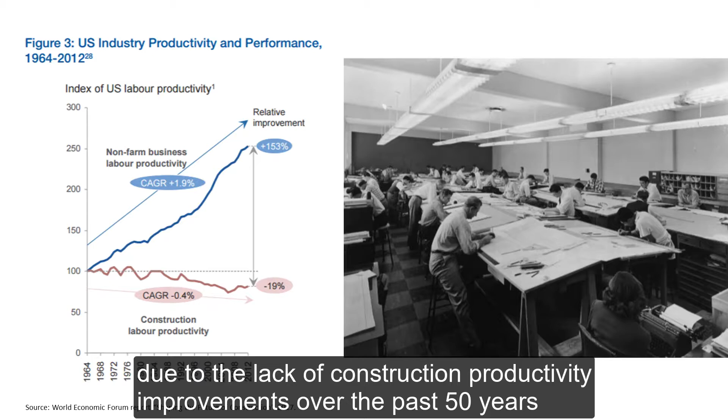There is a risk that the demand for new buildings and infrastructure will not be met due to the lack of construction productivity improvements over the past 50 years compared to other industries. A recent study from McKinsey that looked at industries' move to digitization showed manufacturing near the top at 3.3% investment, but the study put construction close to the bottom at 1.2% investment.

Based on Construction Intelligence Center data for civil infrastructure, total infrastructure spend will total over $10 trillion for the next 5 years. Of this, 50% will be in roads and highways and approximately 25% for each rail and other, such as airports, ports, dams and inland waterways.

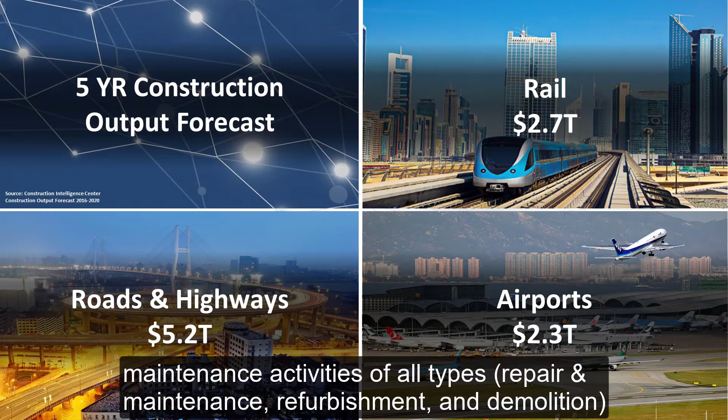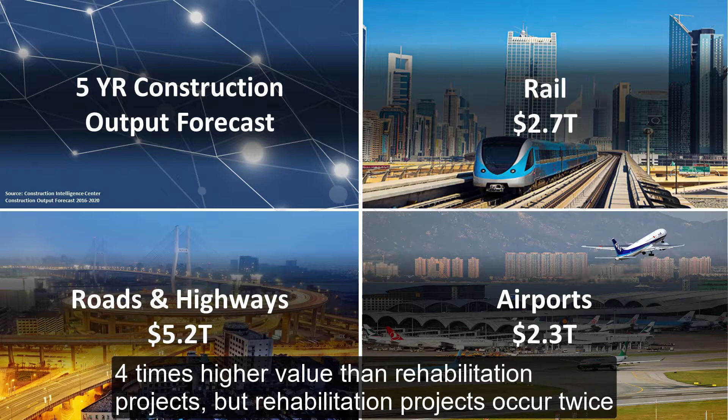Within these transportation projects, new construction continues to outspend maintenance activities of all types: repair and maintenance, refurbishment and demolition. Even though the majority of spend occurs on new construction, there is a much higher volume of rehabilitation type projects. In the US, for example, new construction projects have 4 times higher value than rehabilitation projects, but rehabilitation projects occur twice as much, and 80% of rehabilitation projects are carried out by local government.

Add to this the unrelenting demand of the construction industry as a cornerstone to the industry and overall economy, contributing about 6% of global GDP. That's $10 trillion in annual revenues.

When you look at a construction site though, it can look like chaos. Projects are complex, in congested areas, and close coordination is required in real time. The Boston Consulting Group recently estimated that within 10 years, full-scale implementation of digital infrastructure delivery across the asset lifecycle could lead to annual global cost savings of $0.7 trillion to $1.2 trillion in non-residential construction.

In the era of connection, the infrastructure design industry has a large opportunity to lead the transition to digitized processes, providing more value to their clients. The solution to the industry's challenges, as well as the business challenges of individual consultancy firms, is BIM.

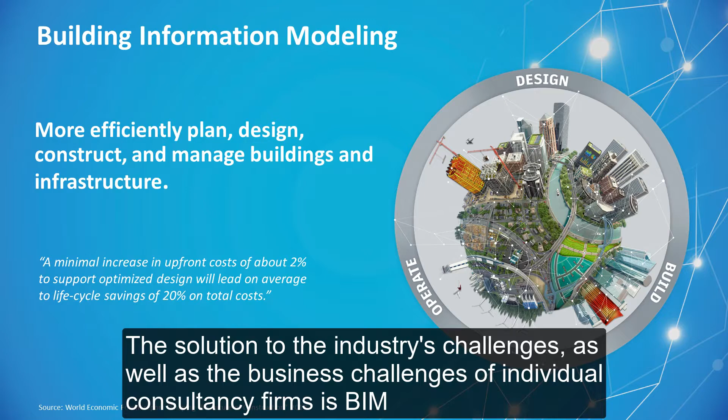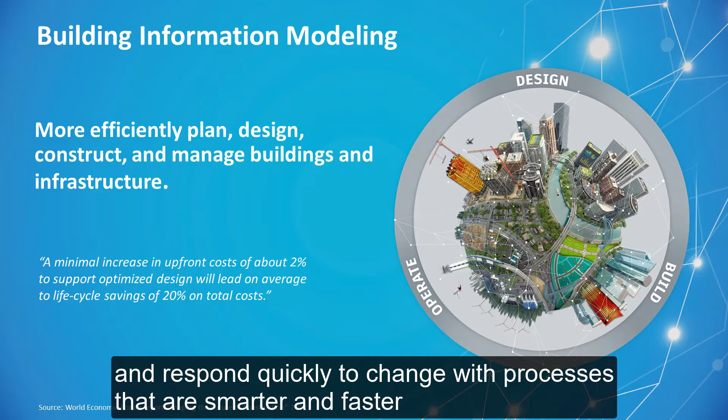Building Information Modeling, or BIM, is an intelligent 3D model-based process that equips architecture, engineering and construction professionals with the insight and tools to more efficiently plan, design, construct and manage building and infrastructure. With BIM, you can improve project understanding and decision making, share and use the same consistent data across the project lifecycle from your desk or in the field, and respond quickly to change with processes that are smarter and faster.

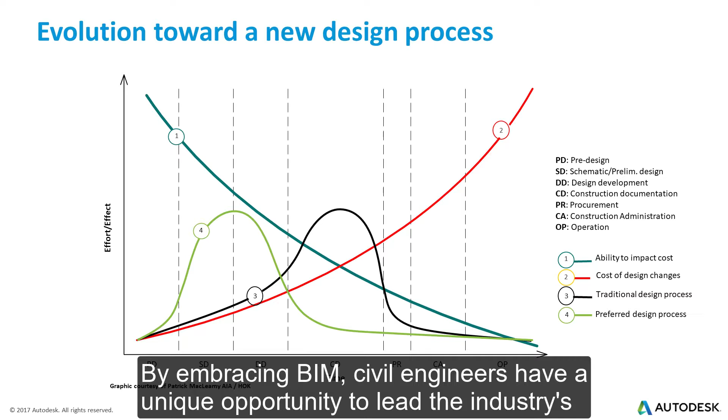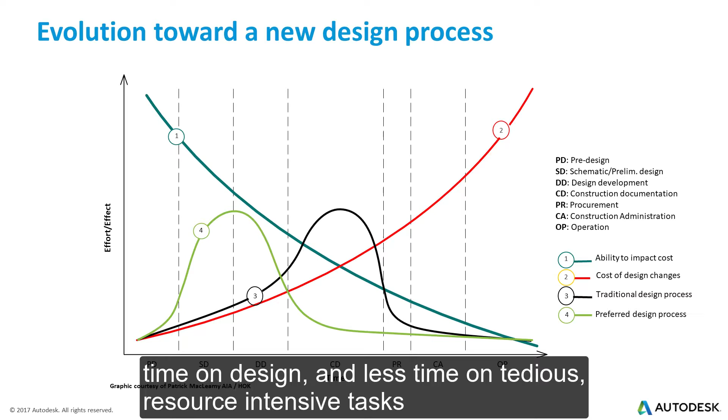BCG and McKinsey go further in defining what digitization means for the construction industry. It is enabled by fast acceleration of technology trends driven by cloud computing and mobile technology. By embracing BIM, civil engineers have a unique opportunity to lead the industry's transformation to a more efficient way of working. BIM allows for earlier design insight and decision making, allowing changes to be made when it's less costly. Because BIM automates the production and coordination of much of the construction documentation needed on a project, civil engineers and designers can spend more time on design and less time on tedious, resource-intensive tasks.

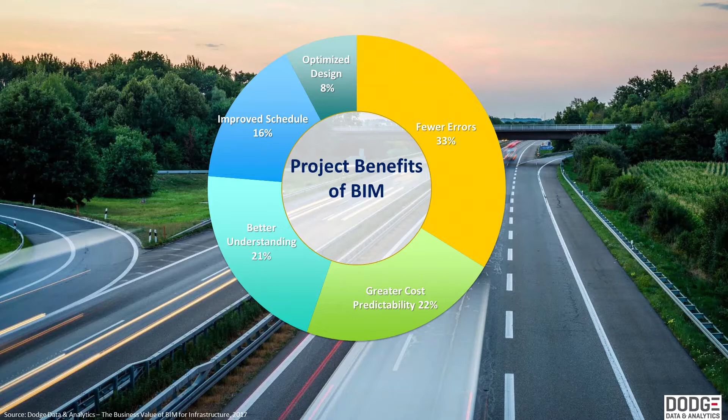Here's a stack ranking from the 2017 Dodge report depicting the benefits of BIM. As we can see, BIM resulted in 33% fewer errors, 22% greater cost predictability, 21% better understanding, 16% improved scheduling, and 8% optimized design. In addition, BIM can help civil engineers address business challenges you are facing today.

This includes winning new work, involving meeting client demands for BIM deliverables, participating in alternative project delivery models, and effectively communicating design intent to earn stakeholder buy-in.

Deliver higher quality designs. This means improved building performance via analysis tools and using visualizations of VR to experience your designs before they are built.

Work more efficiently. This includes reducing errors and change orders, improving collaboration with engineers and contractors, and staying on time and within budget. And finally, expanding billable services, including extending services beyond design and into building operations with model maintenance. Also, recast advisory relationships with clients to deliver long-term value to assets.

These industry trends create specific business challenges for civil engineering firms, including winning and retaining work, expanding billable services, increasing project complexity, meeting sustainable design standards, increasing demand for BIM, and hiring and retaining talent. Traditional 2D practices and siloed ways of working are no longer sufficient, and there is a growing recognition of the need for transforming how work gets done. Increasing BIM adoption by contractors, owners, and for infrastructure projects is evidence of this shift.

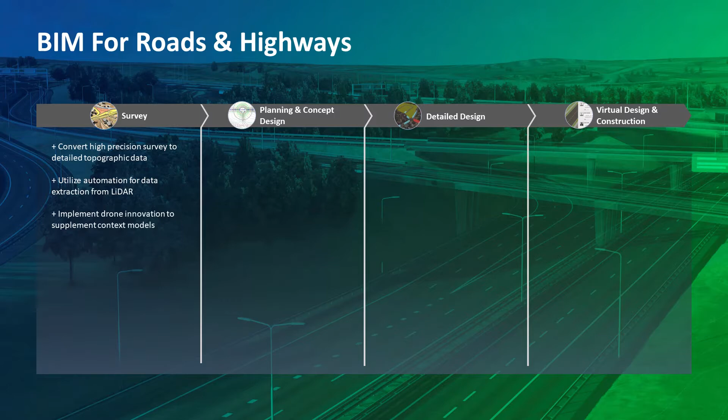By adopting BIM for surveys, engineers can convert high-precision surveys to detailed topographic data, utilize automation for data extraction from LiDAR, and implement drone innovation to supplement context models. Leveraging high-precision survey collection from GPS and total stations to build out existing conditions to begin the design process in Civil 3D. This is the first step to designing in context.

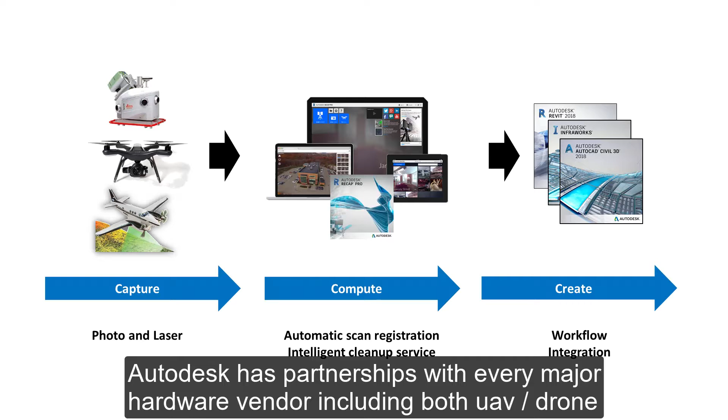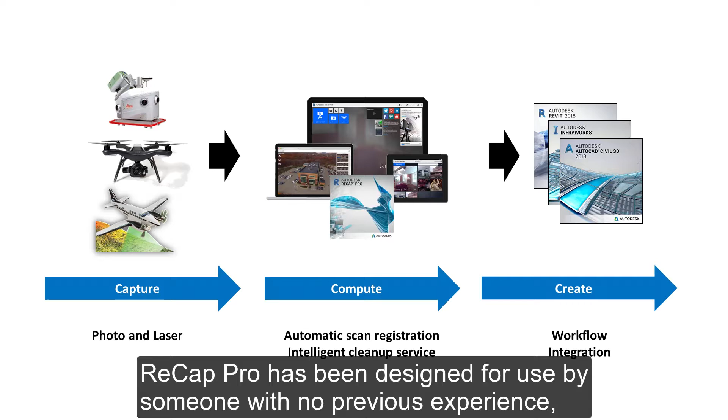Autodesk has created a powerful and easy-to-use workflow for reality capture in order to bring you a scan-to-BIM workflow. Autodesk has partnerships with every major hardware vendor, including both UAV drone manufacturers and laser scanner manufacturers. Recap Pro has been designed for use by someone with no previous experience, so it's very user-friendly.

One-click automated workflows do powerful tasks like scan registration, which stitches multiple scans together into one point cloud, and intelligent cleanup services, which automatically remove unwanted noise.

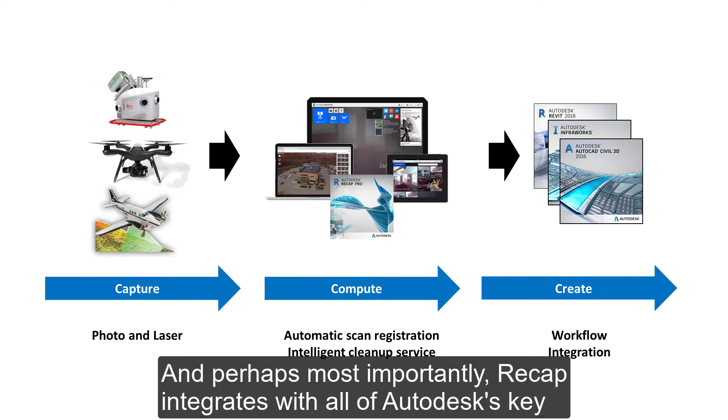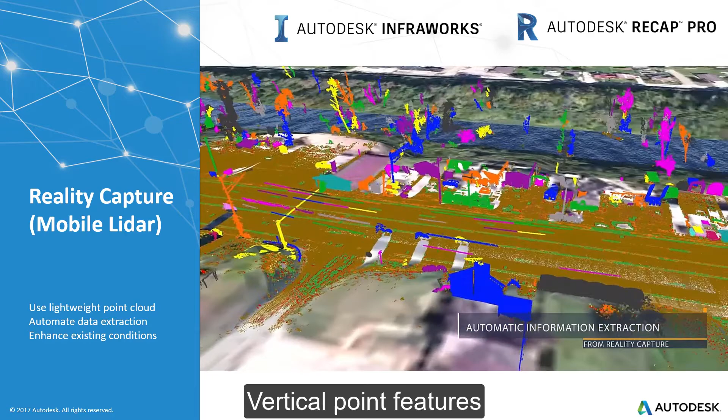Perhaps most importantly, Recap integrates with all of Autodesk's key AEC design creation tools, so you can bring that reality data into the design creation tool of your choice. This includes lightweight point cloud, reducing the original point cloud by 90%, automated data extraction, bare earth terrain, vertical point features and linear features, and enhanced existing conditions using linear features to existing surfaces.

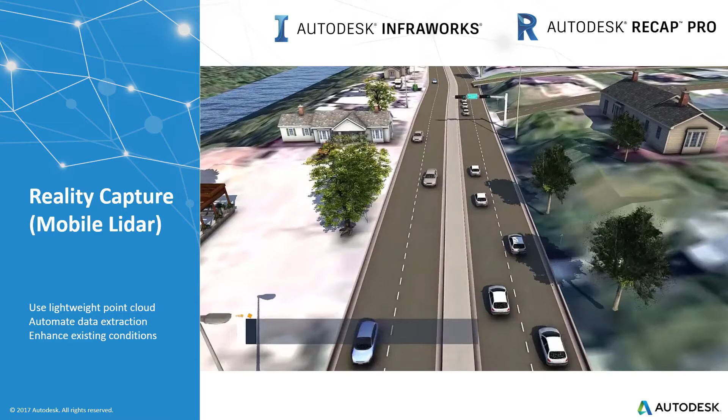Reduce survey effort. Reduce the time required to survey the site. Minimize the size of your survey crew. Improve safety with new methods of data collection. Limit crew activity on active construction sites.

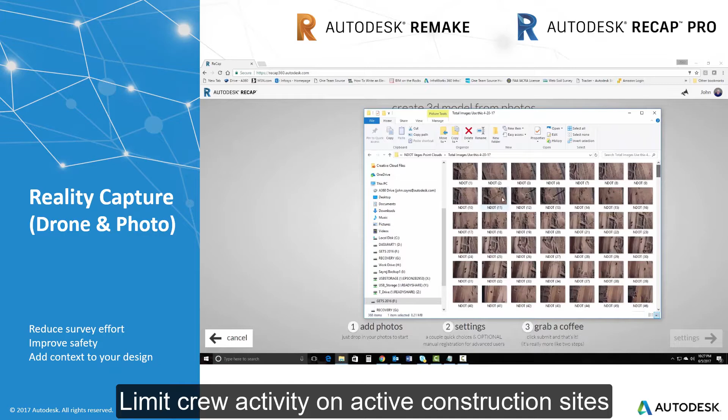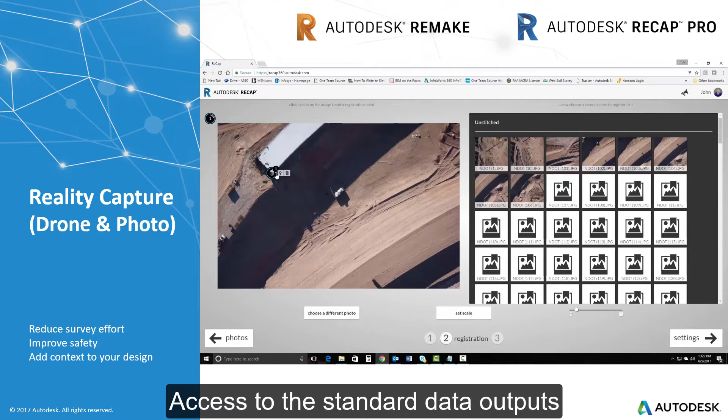Add context to your design. We're the one-stop shop to manage your data, quicker with cloud-based processing, with access to the standard data outputs, quality and format you need so you can begin your design.

Now let's take a look at how BIM and the AEC Collection can help you at conceptual planning.

Aggregate data to create project context. Develop parametric roadway, bridge and drainage designs. Evaluate design alternatives, perform analysis to optimize designs, and finally communicate your design with videos and renderings.

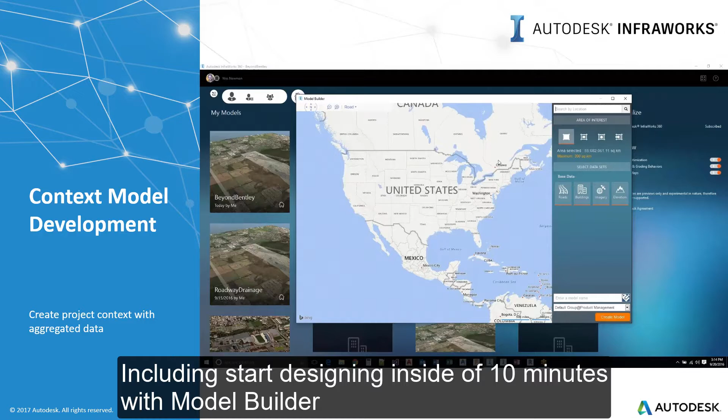Create project context with aggregated data, including starting designing inside of 10 minutes with Model Builder. Aggregate terrain, aerial photos, GIS, CAD and BIM. Get started quickly with the ability to add more detail as needed.

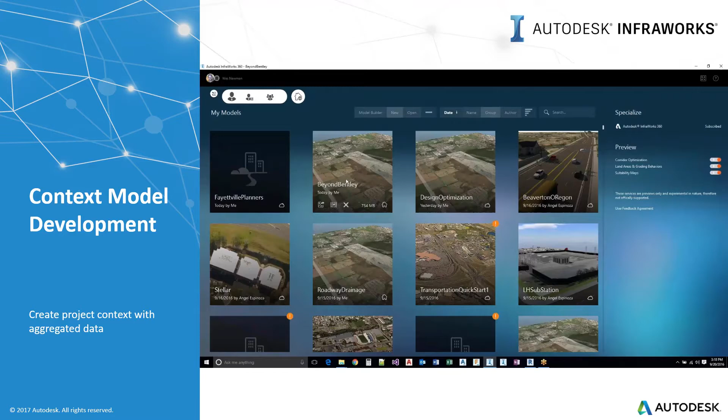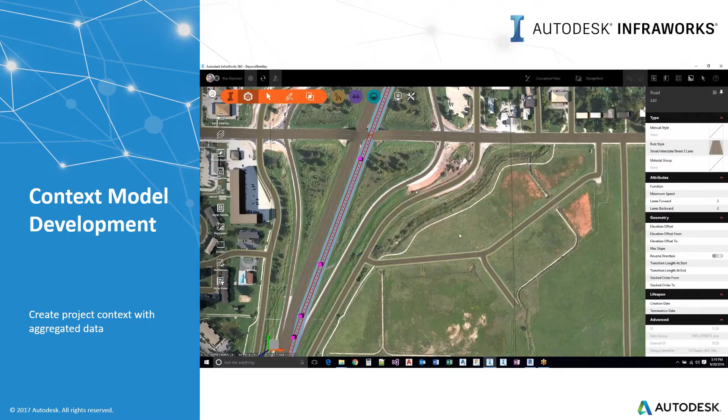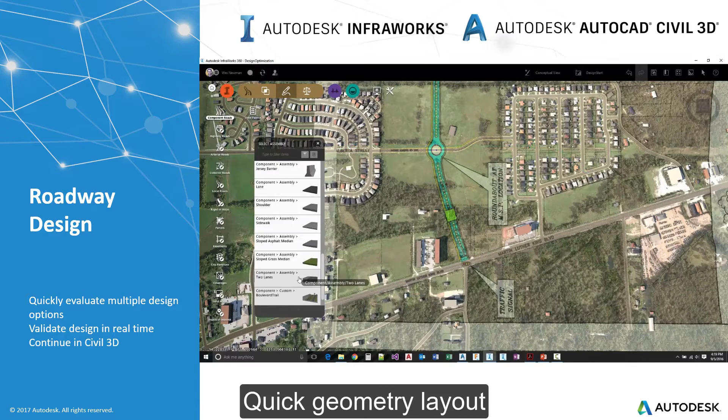Quickly create and examine multiple design options earlier in the process. Quick geometry layout, intuitive model-based design, turning lanes, intersections versus roundabouts.

Validate design in real time within context analysis. Dynamic quantities provided in real time. Profile optimization, intersection design, traffic simulation, and super elevation.

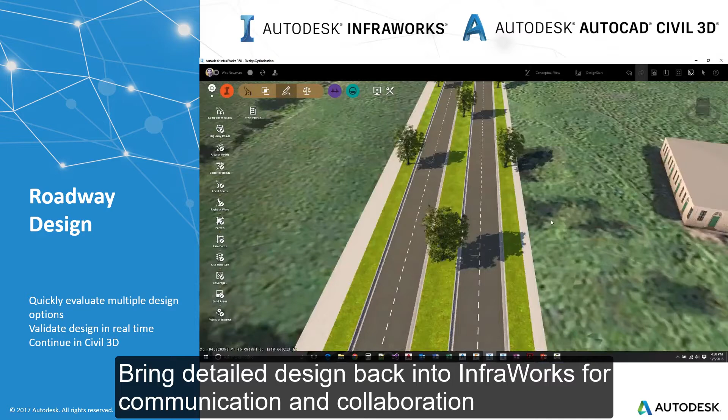Continue design in Civil 3D. Import InfraWorks model to Civil 3D. Continue detailed design and documentation. Bring detailed design back into InfraWorks for communication and collaboration.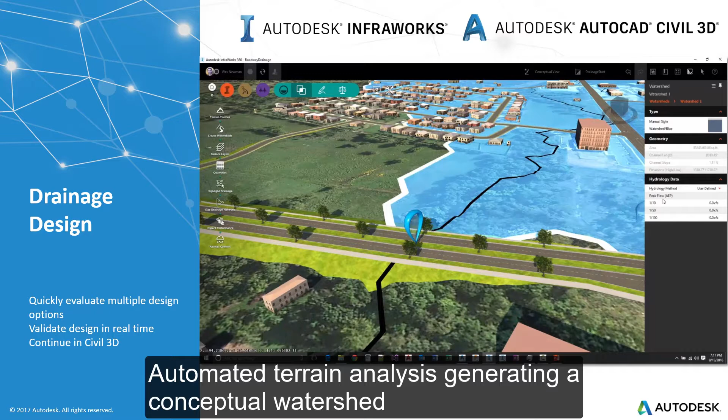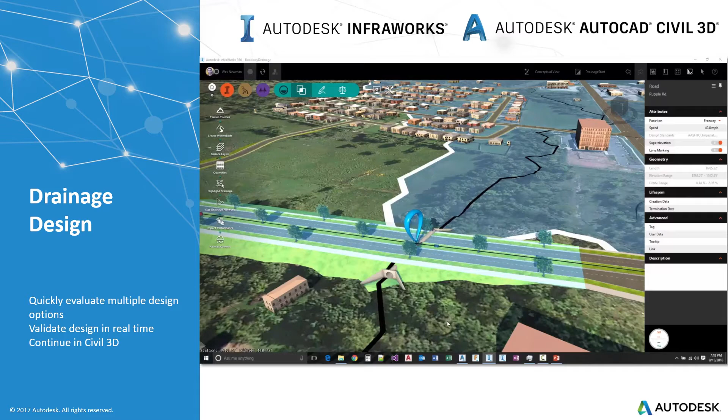Quickly evaluate multiple design options through simplified watershed analysis, automated terrain analysis generating a conceptual watershed, automated culvert location and sizing based on user-defined criteria, automated placement and sizing of inlets and pipes for closed drainage, dynamic quantities provided in real time.

Validate design in real time, integrated design and analytics process, real-time performance feedback of drainage systems like hydraulic grade line, energy grade line, invert elevations, surcharge, etc.

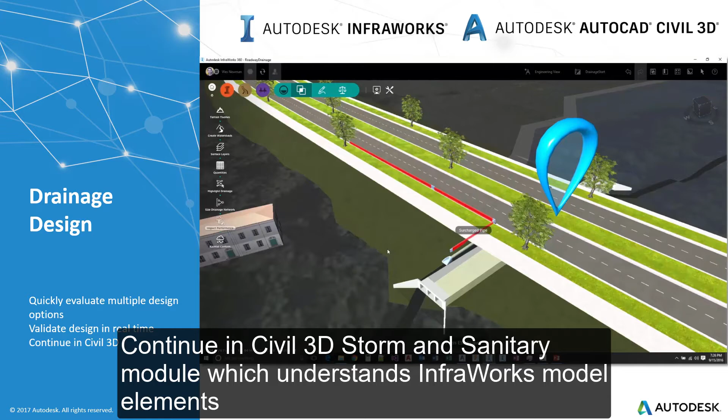Import InfraWorks model to Civil 3D. Continue in Civil 3D Storm and Sanitary module which understands InfraWorks model elements. Continue detailed design and documentation. Bring detailed design back into InfraWorks for communication and collaboration.

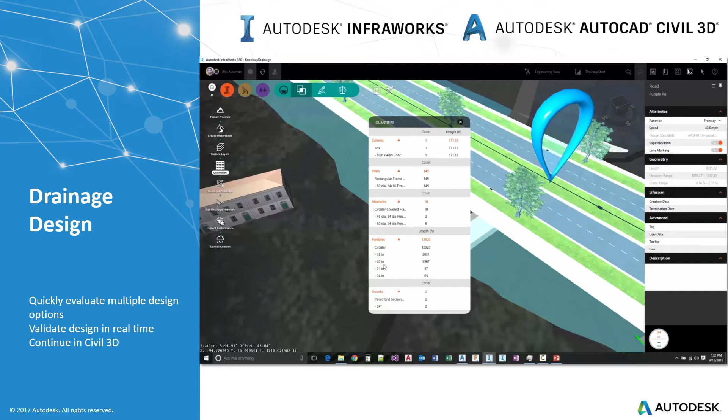Enhanced interoperability brings Revit and InfraWorks together to perform more efficient parametric bridge design. Quickly evaluate multiple design options.

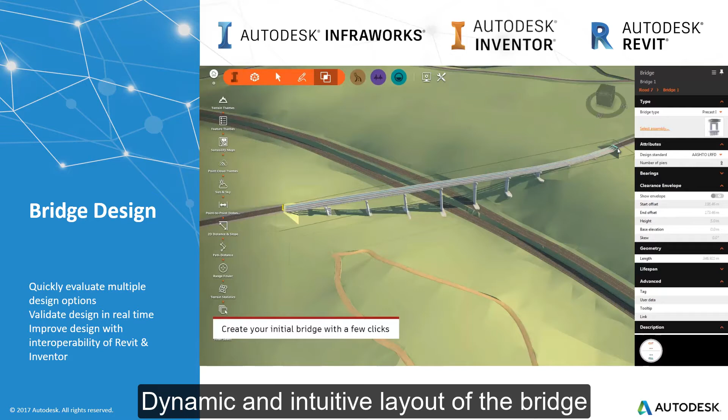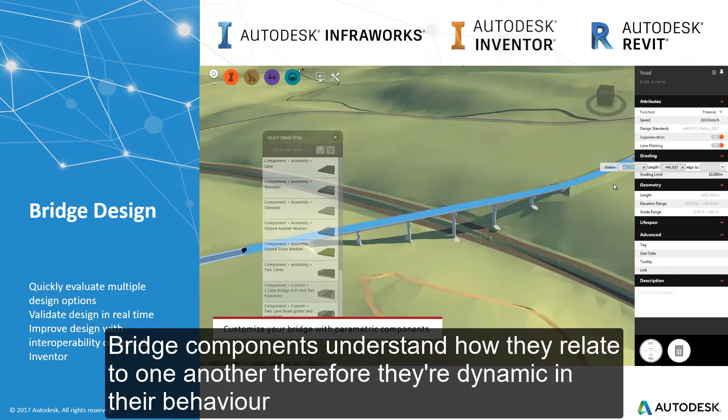Within InfraWorks, dynamic and intuitive layout of the bridge, automated design of components such as superstructure and substructure with parametric controls. Bridge components understand how they relate to one another, therefore they're dynamic in their behavior. Library of bridge components included with all the parametric controls required.

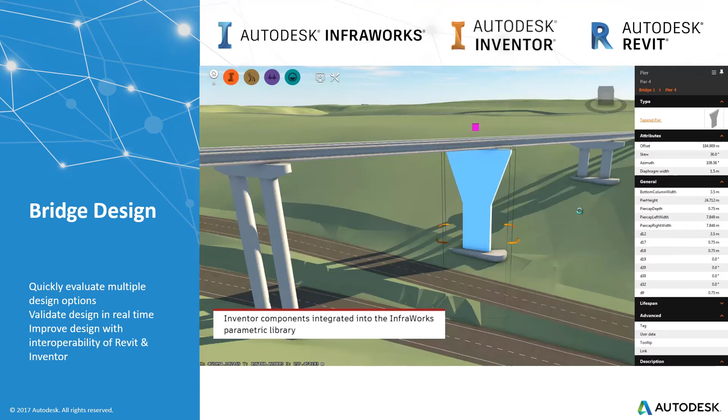Validate design in real time, dynamic quantities provided in real time, built-in line girder analysis.

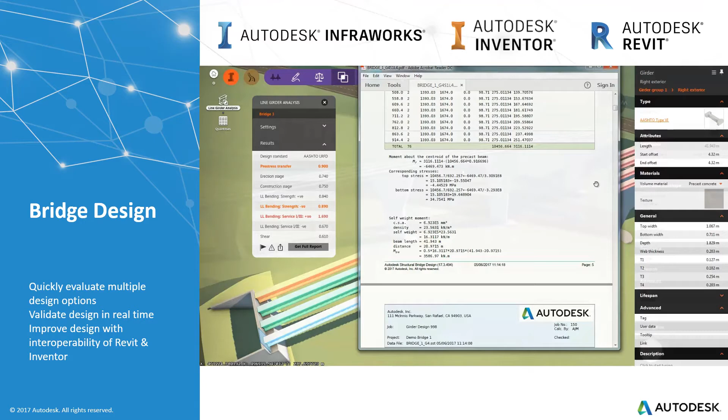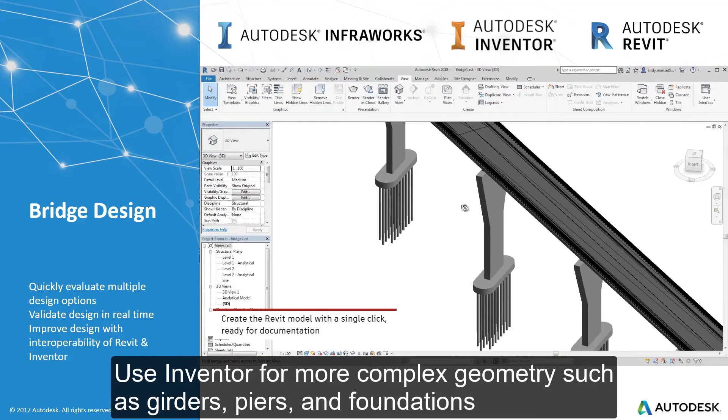Interoperable with Revit and Inventor. Use Inventor for more complex geometry such as girders, piers and foundations. One-click push to Revit. Family support enables Revit functionality.

Now let's have a look at how BIM and the AEC Collection can help you with your preliminary and detailed designs. Design in a dynamic 3D model-based environment.

Design with contextual rule-based standards. Produce plans that dynamically reflect changes. Collaborate across multidisciplinary design teams. And centralized access to project information.

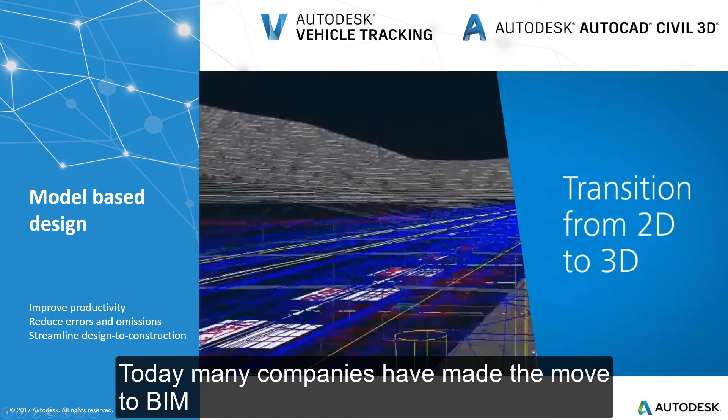Today, many companies have made the move to BIM. Civil 3D in the dynamic model provides an associative relationship between geometry, corridor model and plans, which enables productivity, reduced errors and omissions, and delivering accurate digital data to the field.

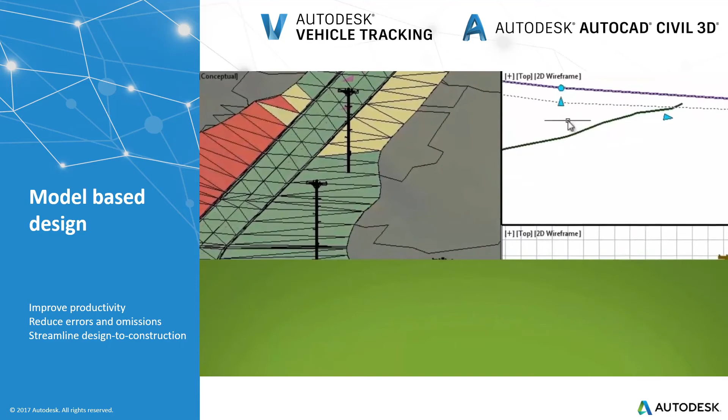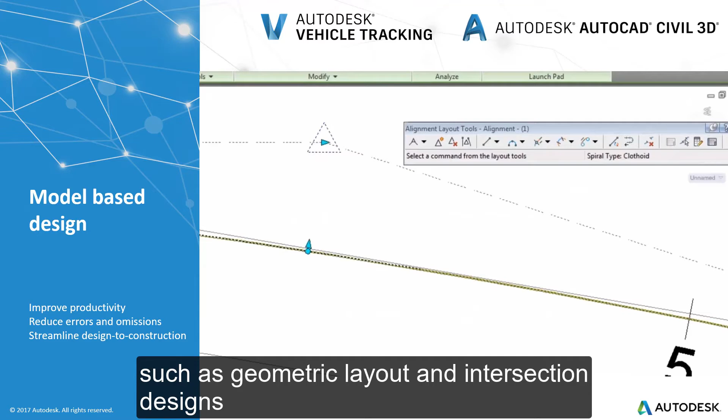Improve productivity by moving from 2D to 3D with Civil 3D dynamic modeling. Perform faster design iterations and streamline time-consuming tasks such as geometric layout and intersection designs. Interoperability with Bentley, Trimble and Topcon.

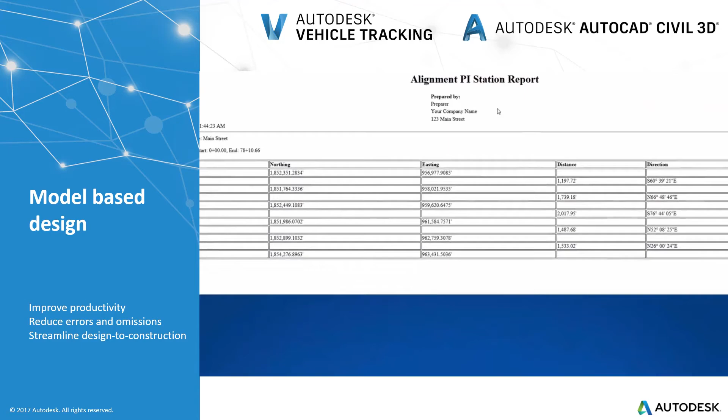Reduce errors and omissions with associative labeling and annotation, standards checking, drainage analysis, design analytics and clash detection. Design to construction: quantities, reports, surfaces and 3D breakline data for survey layout and automated machine guidance.

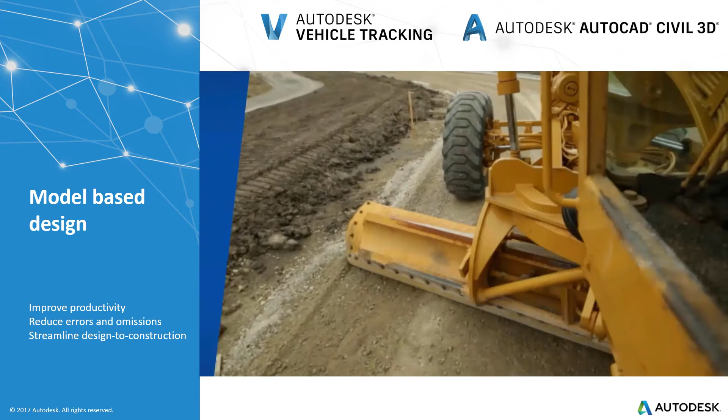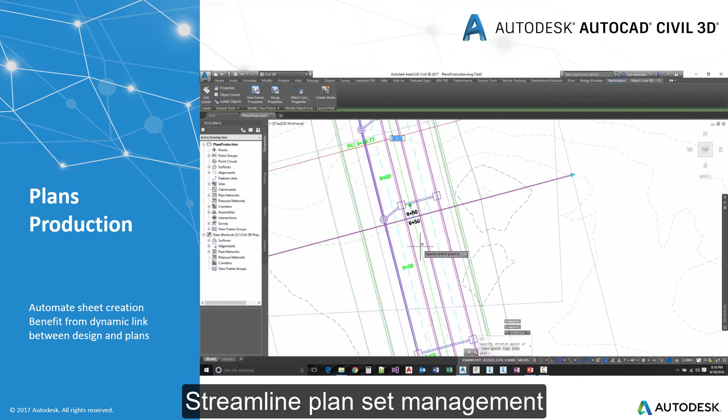Automated sheet creation. Create plan, profile and cross-section sheets, dynamic view frames, dynamic match lines, dynamic link between design and plans, dynamic labeling on sheets, streamline plan set management.

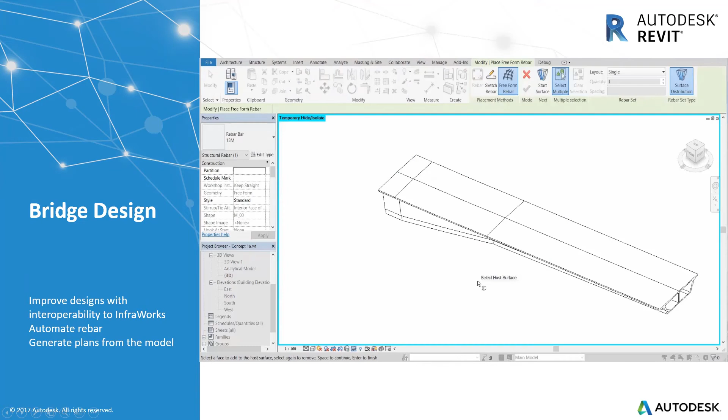Interoperability. Downstream interoperability from InfraWorks facilitates reinforcement, detailing and documentation. Reinforcement: place rebar into non-linear shapes.

Plans generated from the model. Create more accurate, detailed documentation of concrete bridges and structures. Model elements are direct representations of information from the Revit model.

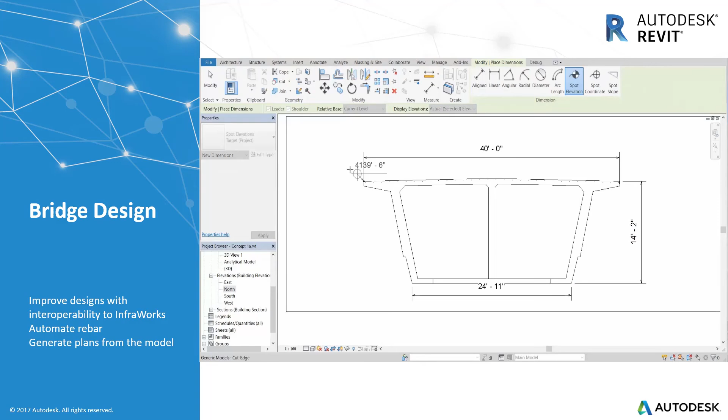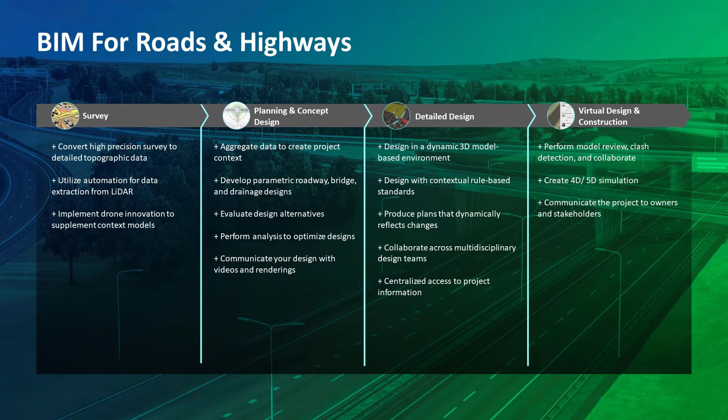And finally, let's look at the benefits gained from virtual design and construction. Perform model review, clash detection and collaborate. Create 4 and 5D simulations and communicate the project to owners and stakeholders.

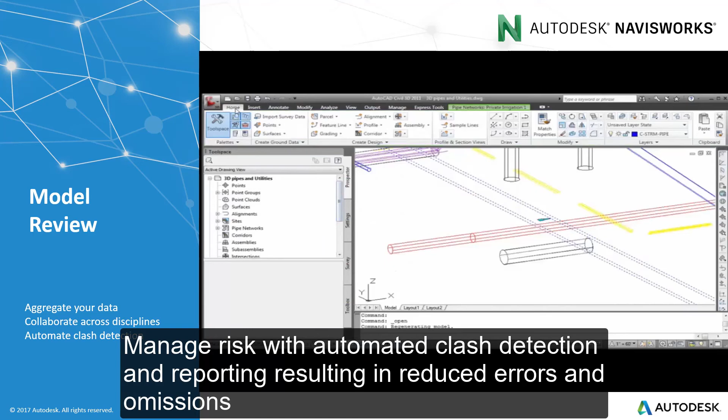Navisworks allows you to aggregate over 50 file types from all major software vendors. Collaborate across disciplines with interdisciplinary coordination and constructability review. Manage risk with automated clash detection and reporting, resulting in reduced errors and omissions.

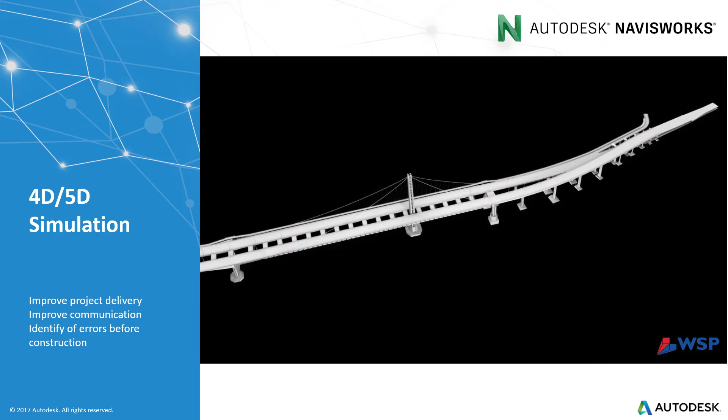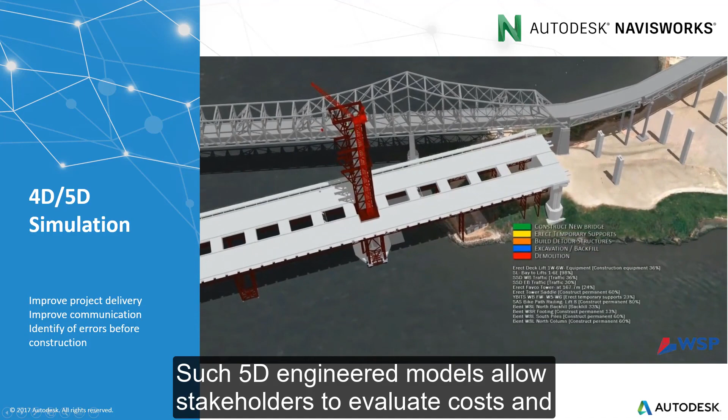4D modelling allows stakeholders to visualise construction over the project duration to identify potential spatial or temporal conflicts in schedule. Adding a cost component to the process creates a 5th dimension, making a 5D model. Such 5D engineered models allow stakeholders to evaluate costs and model cash flows for each phase of construction.

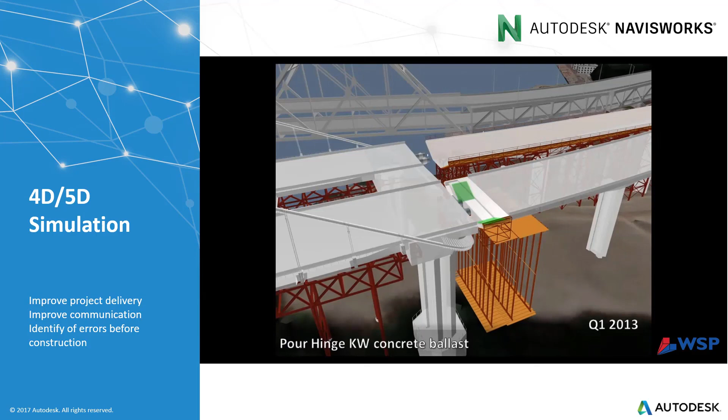The key benefits are as follows: improved project delivery, improved communication, enhanced identification of errors, and improved visualization. What we've covered in this video merely skims the surface of what the Autodesk AEC Collection has to offer. How will you use yours?